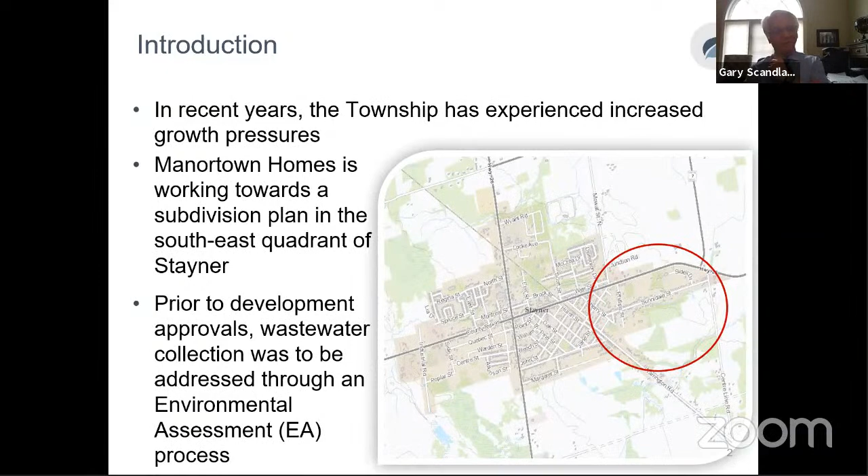Hopefully I can be as eloquent as Jennifer in trying to present the engineering information, so we'll give it a try. Next slide - so they were looking at 3 different solutions, if you recall. They were looking at do nothing, so letting it sit.

Build a new pumping station and force main, which would service basically the whole area. Then they looked at one which was to assess or put the servicing in solely for Manortown Homes development. So they had done the costing and looked at the options. Now, when we get into it, we're looking at option 2, so the costing that we'll be presenting is for the most part option 2.

So putting in a pumping station and a force main and the associated sewers that will service most of the area. And I'll say most because as we were going through, we observed that very large area, area I, which we'll show you in a minute on the map, it's so large, but the development is delayed potentially for perhaps 20 years or longer. And what that does is it impacts the totality of the calculations, and there's a lot of stranded

expenditures that somebody has to front end. And it would be difficult for the municipality to front end it, for Manortown to take all of the obligations, et cetera. So as we get into it, we are actually going to present to some extent a modified number 2 for tonight.

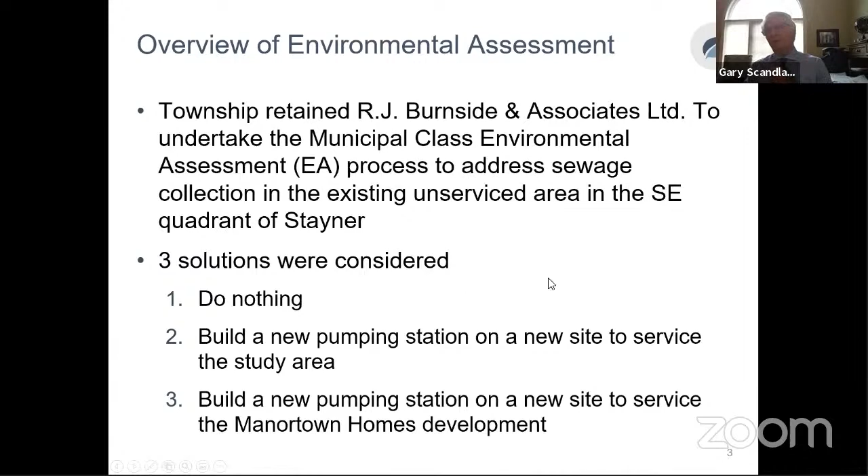And Jennifer from Burnside have adjusted the costing information for the pumping station, the force main, some of the pipes, in order to give you a costing that reflected that. Now, I'll talk a little bit more about it as we get into some of the maps and such.

So for the most part, what we've got is the pumping station and force main that benefits all of the existing lands as well as Manortown and some of the other development related properties. There's gravity sewers that for the most part migrate from the west side down to the east and into the pumping station. There's a small section on the west side of the pumping station they'll fill in. And then there's some upsizing sewers still on Sunnidale and then to Phillips and then to Highway 26.

And as well, there was discussion on the implications of considering urbanization of Sunnidale Street as well. So we'll talk about that.

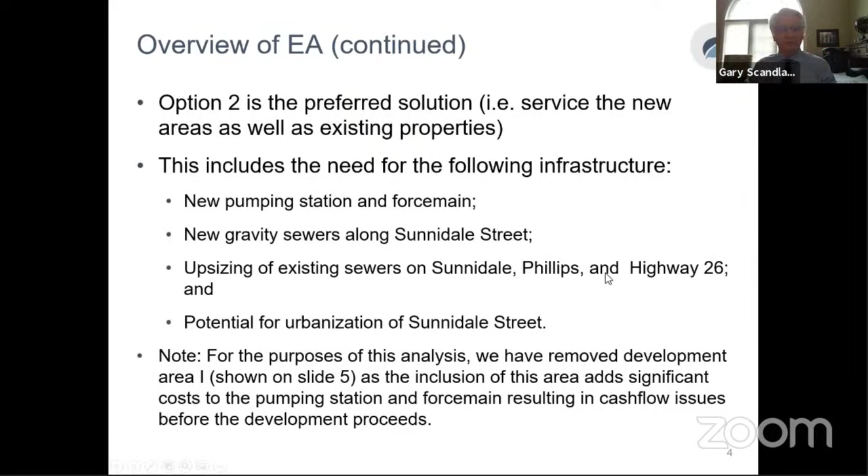As you've noted, the last note, we'll talk about I, because the size of it and the impact of it actually is going to cause problems in cash flow and just allowing this area to develop, because they're not looking to develop in the near future. It's really still in an individual's hands, and even though it's in the built boundary, there's no real movement on that property. So next slide.

But the flows that are coming out of it basically represent almost 50% of the flows that were calculated for all of these developing lands. And that's where we're talking about the cost associated with it is quite excessive. And basically we'll be sitting there with stranded expenditures that can't be cash flowed.

So the biggest impact really is they will have to build a connection main to the pumping station. For the most part, it looks like the rest of the pipes can handle additional flows. We might have to do some improvements to the pumping station, upsize the pumps, might have to put some additional wet well capacity. But for the most part, it could probably be handled with subsequent engineering. So we've looked to not include them in the calculations right now.

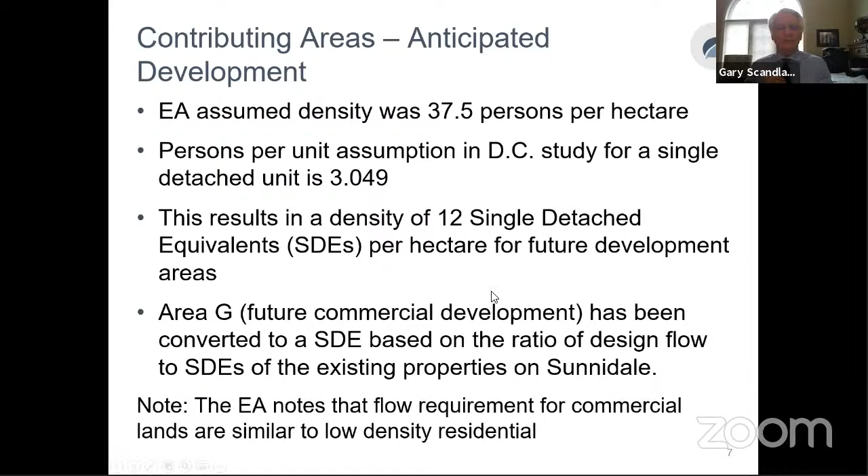If we go to the next slide, this is where we've got the calculation. So we have E on the far left-hand side, those are the areas I started with on the map. You remember H was the yellow area for the existing. So these are all the different lands. We have the area, and then the design flows, and then we've converted all of that. By the time we get to the extreme right-hand side, those particular properties have the equivalent of X number of single detached units.

So the flow associated with those lands would be equal to 14 single detached, or 20, or 38, or 59. You can see that when we look at I, when I talked about it being basically half the lands, when we convert it to single detached, its flow is about half of the total area. That's that 259. That's why we're suggesting to remove it from servicing right now, and then we'll do the rest of the calculations on the benefit arising from the residual of the lands.

Now, when that area I comes on stream, any improvements will be 100% charged back to I. So if there's improvements on upsizing pipes, that'll be their cost. When we may need to make changes to the pumping station and the storage in the wet well, that'll be 100% their cost. So we've actually reduced the cost from what Burnside had put into the EA, in order to reflect a smaller servicing area. Next slide.

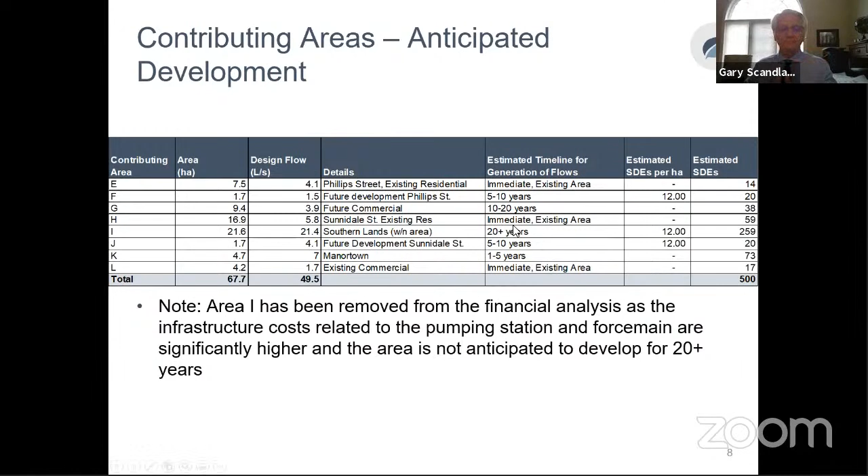So when we get into it, I'll show you a chart in a moment that takes each of those pipes, the pumping station, and the force main, and allocates it amongst different benefiting lands. And so we have, obviously, the Development Charges Act.

The development charge for sewers that you've passed would be one component of paying for these works. We then have Part 12, which is almost like a local improvement, but we always use this section of the Act because local improvements are a very cumbersome piece of legislation. You can do the exact same thing and impose a capital charge under Part 12 of the Municipal Act.

It starts with clause 391. Why we always suggest it is it's far more flexible on how you do the calculations, where local improvements has a very narrow way of doing the calculation.

It also allows council, once you pass the bylaw, then it cannot be appealed to LPAT. The local improvement can, so then there's all these deductions and adjustments. But for full cost recovery, when you go through the public process and finally make a determination, those charges being imposed are basically non-appealable. So it's a very strong piece of legislation, but it does mean you should have a public process to engage everyone so that you've taken all of their comments into consideration.

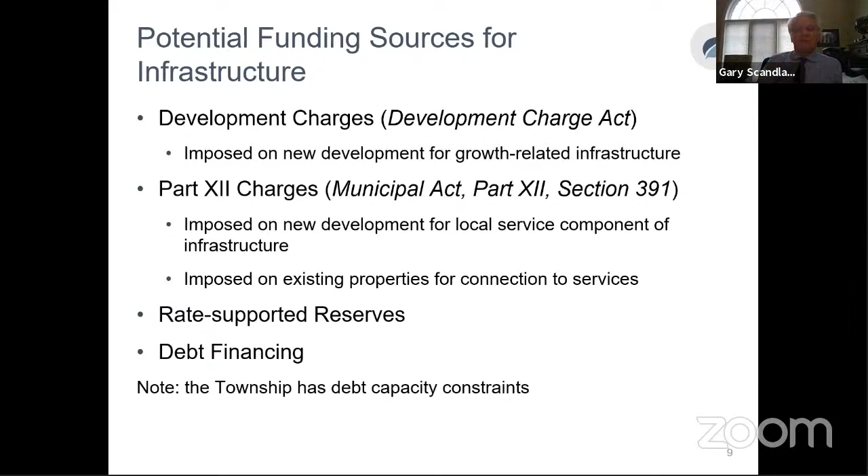So those are the key pieces of legislation. If we go to the next slide, this is how we've broken the costs down. So we have development charge projects: the new pumping station, as well as the upsizing of the existing sewer on Sunnidale and the upsizing of the Phillips Street sewer. They were identified in the development charge study, so those are part of the DC provisions, paid for by growth.

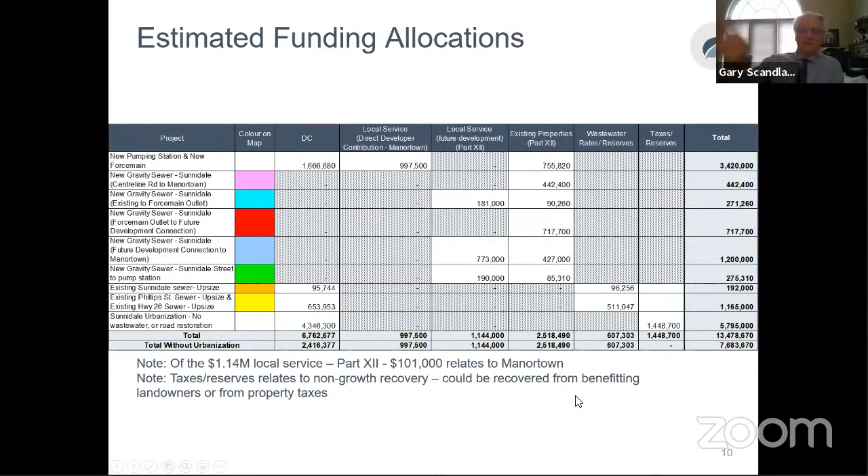When we jump forward a little bit, we'll also be looking for Manortown to cash flow those growth-related projects under the DC. You can see the very last project, the Sunnidale Urbanization road — 4.3 million is DCable, roughly 1.5 million recoverable from existing properties, about 5.8 total. That project doesn't have to be done today; it's in the DC and can be done at any time, whether now or 5 or 10 years from now, at the discretion of council. So it's not integral to making this servicing plan for the sewers work, but it is there to be considered.

As we move across, you can see that when I talk about local service, those are pipes that benefit growth, but they're smaller sized pipes.

And therefore they are paid for by the developers for their share. So the first local service is a direct contribution by Manortown. So they'll not only pay the DC portion, but they'll also pay a local share of it.

As we move to the right, you can see some of the gravity sewers, because remember, we're building on the flows going through the pipes. So some of the G and some of the J benefit from the construction of these sewers as well, so that would be recoverable from those lands, but we'd recover it under the Municipal Act. The existing properties would be under that Part 12 charge, and this is their share of all the works. Then there's a small component that would be paid for through the wastewater rates or the reserves.

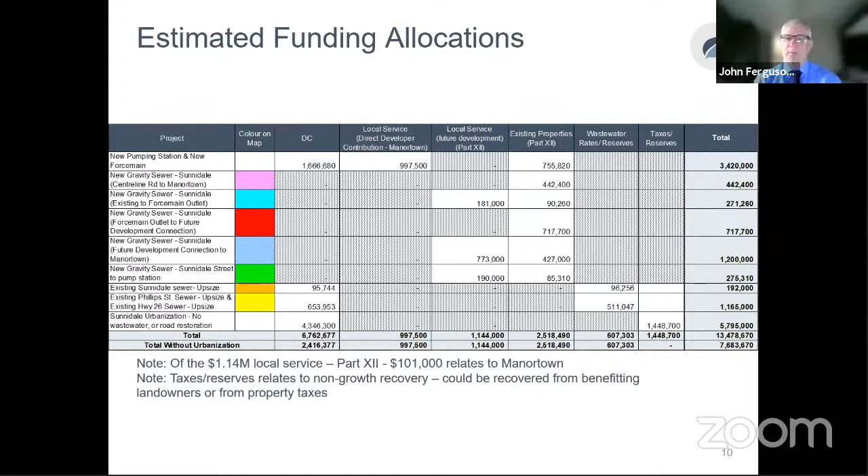Through you, Mr. Mayor, good question, Mr. Ferguson. You can offer them to pay it immediately, or most municipalities allow them to pay over a period of time. You have the flexibility to allow a 10-year, 15-year, or 20-year loan - it's your choice. If we look at places like King City and Nobleton, which put in extensive sewers, they basically did a 15-year debenture, and roughly 35% of the people settled their cost immediately, and 65% took the loan.

Anybody else with any questions on this slide? I have one for Gary and/or Mike. I know we've been speaking a lot about Sunnidale, but I'm interested in Phillips Street, wondering if there's any urbanization plan for Phillips Street as a result of both the Ashton Meadows requirement on that street, and now this Manortown/Sunnidale forcing Phillips Street to be dug up and have a new pipe put in. Is there any talk of urbanization or any recoup in regards to that along Phillips?

Your worship, the Phillips Street north of Sunnidale Street is part of the EA area. The part that goes south from Sunnidale Street would be the part that Ashton Meadows requires to service their lands. That street does not go straight through, so there's not going to be an intersection at Warrington - there will be a servicing corridor, an easement only. The road is too narrow between Highway 26 and Sunnidale Street to do anything with it. We're going to put a sewer line in there and keep the existing one active while doing it - we'll be lucky to do that, it's going to be a tough job. There's no room there, the right of way is very narrow. So no, the short answer is no, we won't be urbanizing Phillips Street, and it wouldn't be considered.

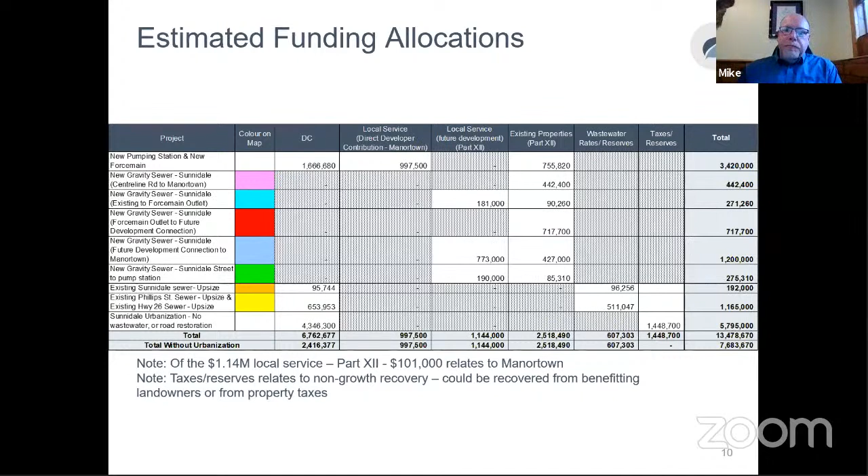Sorry, Phillips Street, you meant we will not be - Phillips Street, thank you, yeah we will not be urbanizing Phillips Street. Other than when it's all said and done, it'll be a nice new piece of asphalt on top of all those new pipes, is that right? Yes, sir. Okay, all right, I think we've banged that one around. Anybody else?

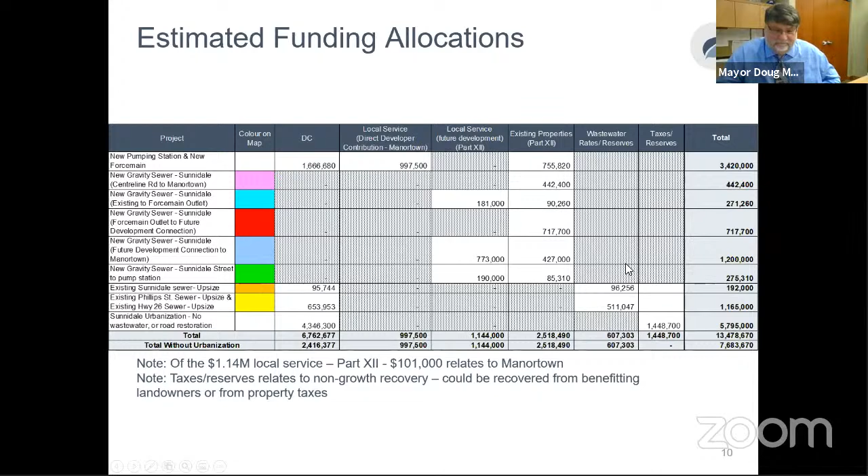I'll turn back to Daryl and Gary. Go ahead. Thank you, Mr. Mayor. Next slide please. So if we take the cost extending off of that local, that part 12 amount for the existing properties, and we've costed it all in on the left-hand side, let's go on the right-hand side.

The right-hand side is the share of the wastewater servicing only, so it doesn't include the urbanization. There's about $2.5 million that has to be collected from the benefiting properties, so it's approximately $28,000 per property.

For that benefit, if we add on top of that the cost of the road, it's about $44,000 for the sewer servicing plus the urbanization of Sunnidale. I looked at the 27 versus the 44, that's where I came up with my 17. With rounding, it's actually about $16,000 difference per household.

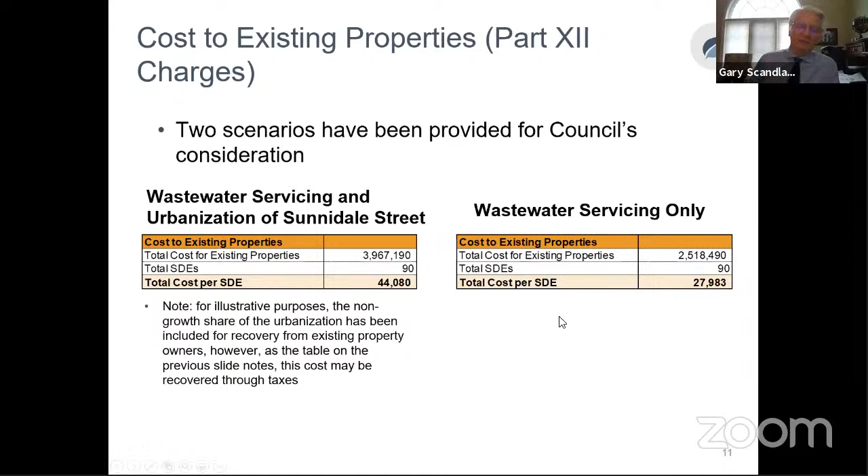So if we go with the servicing and the benefit of the wastewater, we'd have to be offering loans. We'd be debenturing. We'd offer the residents the opportunity to pay their $28,000 up front, or give a loan over 10, 15, 20 years, whatever council deems most equitable. And if we go with the urbanization, then I have to consider that extra $17,000 charge.

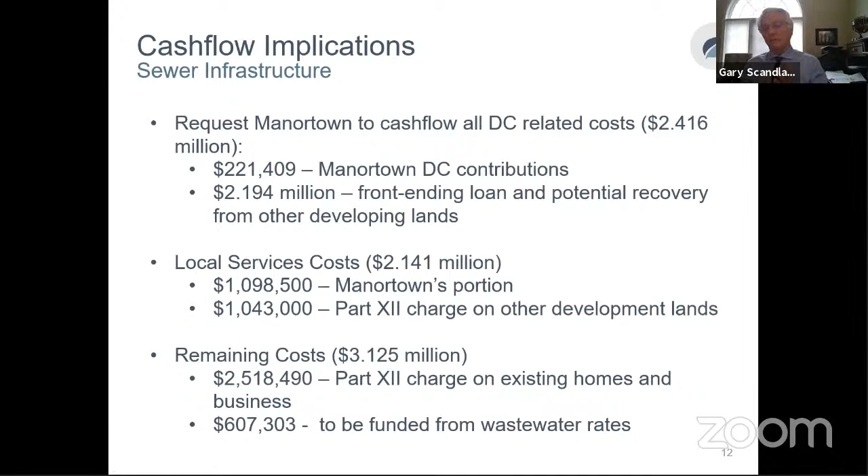If I stop there, Mr. Mayor, are there any questions on this particular one? Okay, we'll open it up. Is anybody?

Carry on, gentlemen. We were hopeful of reaching out to Manortown before this meeting. Unfortunately, because of my scheduling and stuff, I do have some hearings that are in progress, so I didn't get the chance to connect, but Daryl and myself will connect with them over the next couple of days to chat to them about this, and then we'll provide those comments subsequently.

And then the next slide just talks about next steps. This is the last slide. With council's direction,

we'll talk to Manortown about their financial obligations arising from this. We need council's direction on the impacts on the existing homes for the wastewater servicing, and then potentially for the urbanization. Some of the costs we identified here are higher than what we originally included in the development charge. Obviously, we had estimates from a couple of years ago, now you've had Burnside doing very detailed work, so we'll need to update some of those costs.

And just as an aside, the work that Burnside's been doing on the water supply, the costs are actually increased as well, so we can wrap all of that into an update of the development charge. We would look to do that over the next 2 or 3 months.

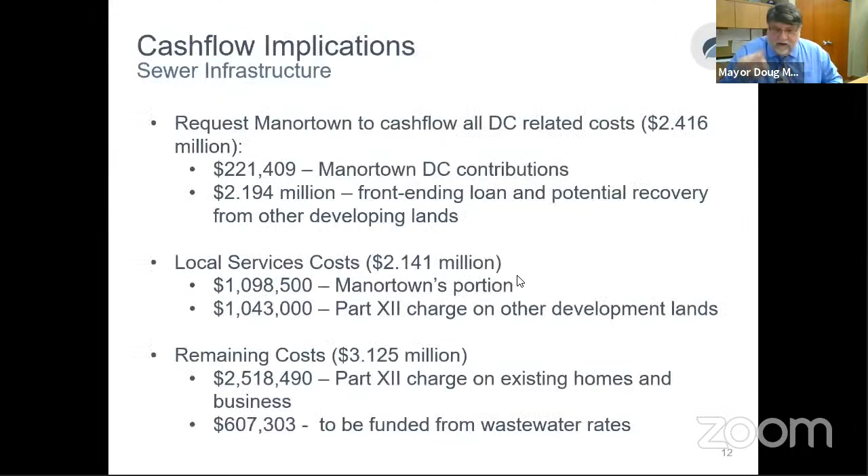Go ahead, John. And while John's speaking, Daryl, could you put up the map that shows the different areas with the letters? Go back, keep going. One of the first indications. Keep going, right there, just leave that up for a minute. Go ahead, Barry. Or John, I'm sorry, go ahead, John. No, thank you, go ahead, Rick. Barry, I'll wait until Barry asks his question and then I'll.

I'm done. Okay, Mr. Lamers, go ahead. Too many Johns on my screen here. Thank you, Your Worship. With Gary or Mike, with all these

calculations and everything, does anything apply to decommissioning the old septics, or is that all on top of this again? Mike? Yeah, no, Councillor Lamers, through the chair, decommissioning and connection to individual houses will be borne upon the homeowner, will require plumbing inspections, and it's not included in this.

This project stops at the municipal property line. Is that helpful, John, Lamers? Yeah, so all these numbers, 17,000 or whatever, you're adding another 3,000 to 5,000 on top of that to decommission these properties. At least 5 in today's numbers. Yeah, perhaps more than that even.

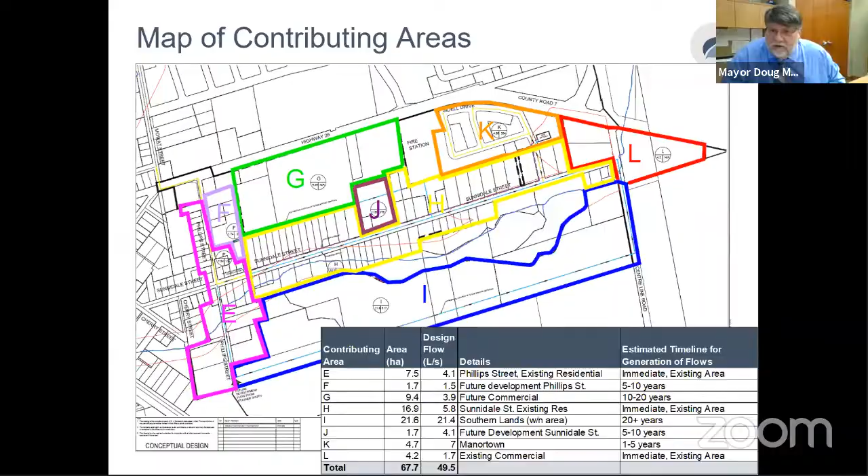Anything further you want to add? No, that concludes our remarks, Mr. Mayor. All right, well, thank you, gentlemen, and we appreciate that. So, Mike, you have a report. Do you want us to put this on the table and you want to speak to it, or what's your pleasure, Mike? It's your report.

You can read the recommendation, your worship. Basically, it was just to get something, an official recommendation from council based on what Gary's presented. Okay, all right council, well it's your pleasure.

I will read this PW 017-2021, the Stayner Southeast Sewer Financing. Recommendation: be it resolved that Council of the Township of Clearview hereby one, receive the Stayner Southeast Sewer Financing report for information. Item 2, direct staff to create financial agreements with benefiting developers. And item 3, direct staff to provide a bylaw outlining conditions for sewer connection fees for existing properties in the study area.

So on the floor, can I have a mover and seconder please? That'd be Councillor Broderick, seconded Councillor Leishman. Any questions or comments on the report and on the direction so far? There are no comments. All right, I'll call the motion. All those in favor? And that motion carries, thank you very much.

Thank you, council. Thank you, staff. Before we leave this, Mike and or Mr. CAO, would you guys be able to advise when we would be able to go to the public with this presentation so we can have this meeting and get some input? What's your thought on that, Mike and John? So if I may, Your Worship, we need to reach out to Manortown first and find out where they're at with the financing.

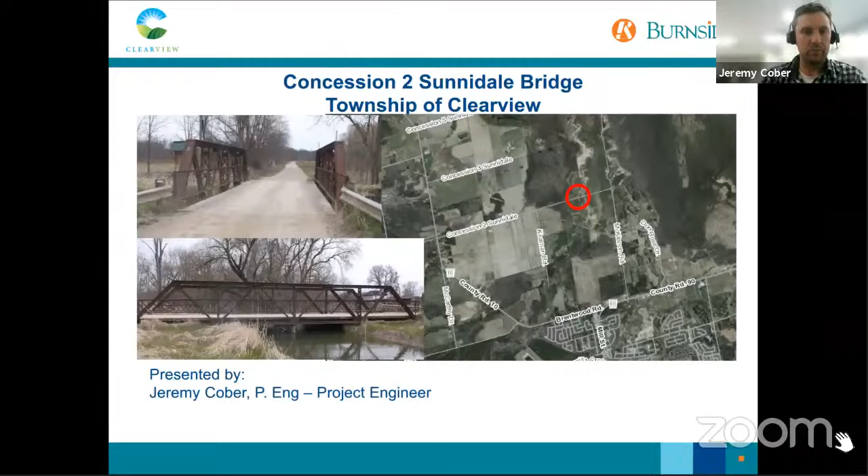All right, so good evening, Your Worship and council. My name is Jeremy Cober, I'm a professional engineer with RJ Burnside. Tonight's presentation is regarding the condition and the current temporary closure of the Concession 2 bridge. It's located on Concession 2 between McKinnon and Kearnan Road, down in the southeast corner of the township, close to the border with Essa Township. We've got a couple photos of the bridge there. If you want to jump over to the next slide, Kayla.

So the purpose of tonight's presentation is to provide a summary of the structural condition of the bridge, identify various repair options, replacement options, identify any current use patterns, local resident property concerns, and the procedures required for closure of the bridge if that is required.

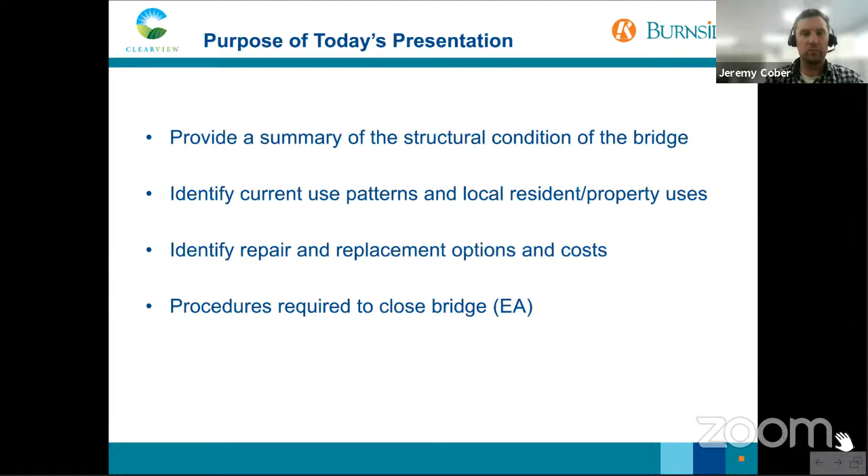So the Concession 2 bridge, it's numbered 324-01. It's located over the Mad River, approximately 3.7 kilometers east of County Road 10. The structure consists of a steel truss bridge with a timber deck with an unknown construction date. It's expected that it was constructed likely in the 1930s vintage. The structure was a sister structure to the bridge on Kearnan Road, which collapsed in the mid-2000s, which resulted in the closure of Kearnan Road. The bridge span is approximately 18.2 meters. The road width over the bridge is approximately 4.2 meters, which currently restricts the use of the bridge for agricultural vehicles, just due to the width.

The structure is inspected every 2 years in accordance with the Ontario regulations and the OSIM inspection manual, along with all the other bridges within Clearview Township. The structure was rehabilitated in 2011 following some damage to the deck and some of the stringers. That rehab consisted of replacing some of the steel beams under the bridge, along with replacing part of the timber decking.

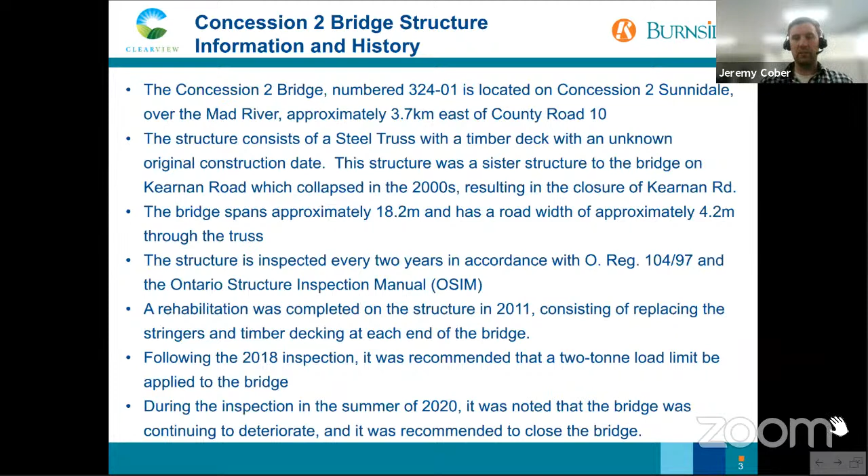Following the completion of the 2018 inspection, it was recommended that a 2-ton load limit be applied to the bridge. And following the inspection last year, completed in May of 2020, it was noted that the bridge had continued to deteriorate, and a recommendation was made to the township to close the bridge.

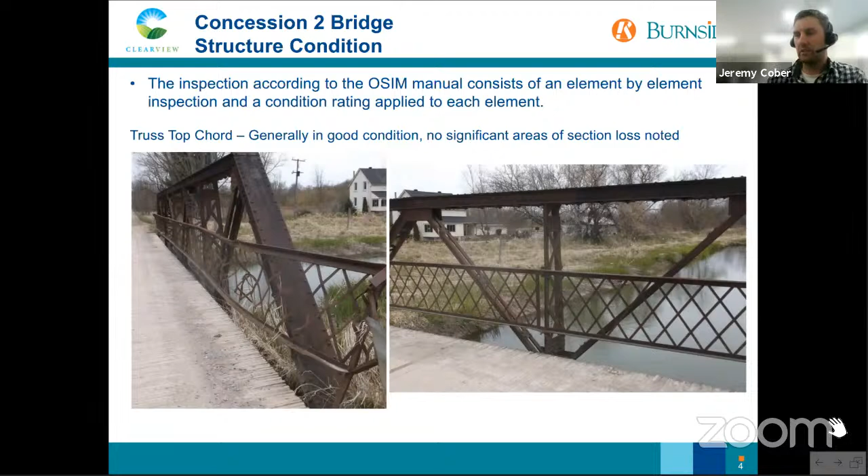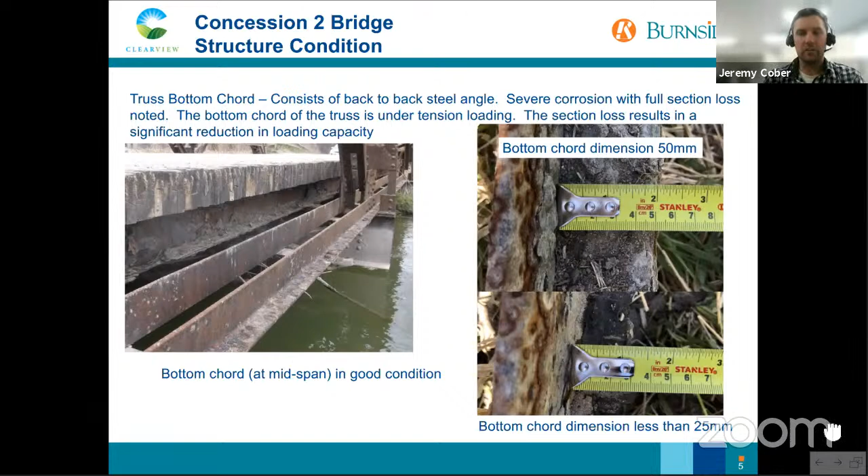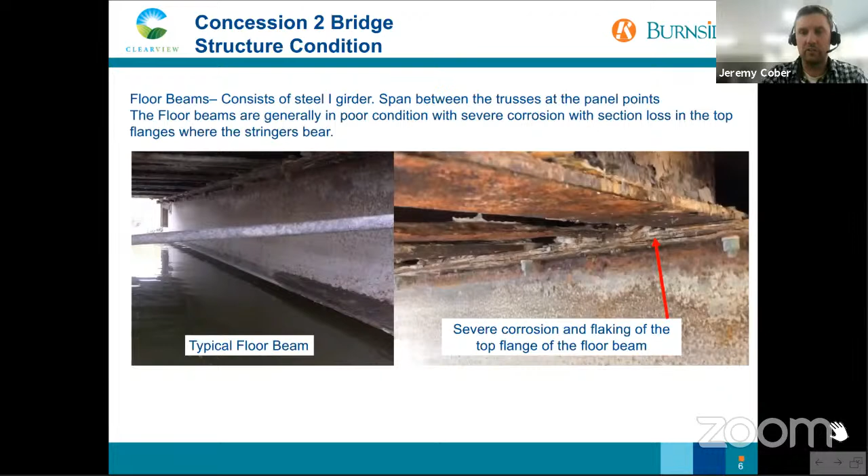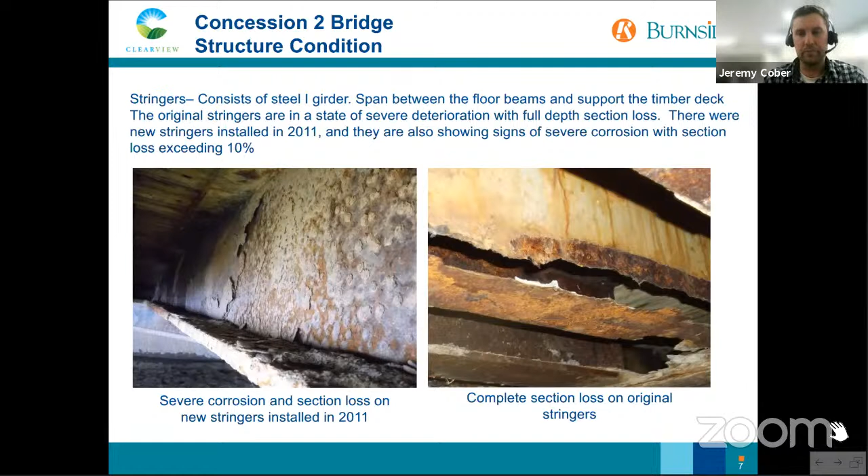So the primary factors leading to the recommendation to close the structure in May 2020 was the severe corrosion and section loss of the bottom chord.

That angle iron performs a key structural component to the bridge. It acts primarily in tension, and if that chord was severed, there's basically nothing to keep the legs of the truss from spreading out and the truss collapsing, which would be a catastrophic failure of the truss.

The severe corrosion and section loss on the floor beams and the stringers results in a reduced capacity of the structure and the potential to punch through the deck if those girders were to fail, or additionally a potential catastrophic failure of the bridge if one of the floor beams were to fail, which would result in whatever vehicle was traveling over it falling down into the river.

Some other observations were made about the bridge and concession 2 in general. The bridge is routinely submerged underwater during spring melts and also during large rain events. This has led to accelerated corrosion of the stringer and floor beams due to repeated wetting of those elements. We know that as steel gets wet and dries, it accelerates corrosion.

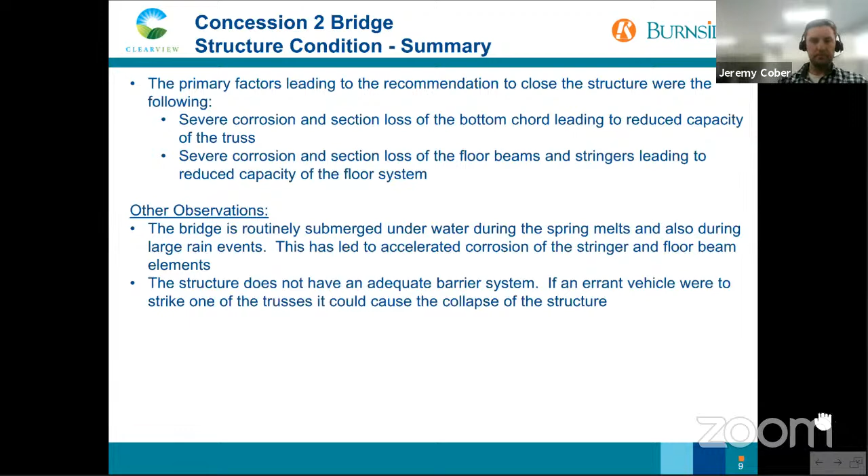Just a few notes on concession 2 itself. From the bridge to the east is a no winter maintenance road. During the spring melt and during large rainfall events, that section of road is often underwater and not passable. I believe it's often temporarily closed for a good part of the year.

Due to changes and siltation in the river system, there's been significant deposition of sediment within the Mad River over the last 30 years. Talking with Steve Sage and Mike, and also Steve Riley from Burnside, 20 years ago that bridge used to be able to be walked underneath with plenty of room to spare.

Now there's less than about 3 to 4 feet of clearance from the bottom of the stream to the underside of those girders. Basically, there's been 3 to 4 feet worth of sediment settled into that river, which has significantly reduced the capacity of the Mad River in that area.

That's resulted in a lot of water going over concession 2 and also being carried east along the ditch, which has been cleaned out along concession 2, and over and under through the culvert on McKinnon Road and out towards the Nottawasaga River, as opposed to continuing along with the Mad River and joining further upstream or downstream where the Mad River actually joins the Nottawasaga.

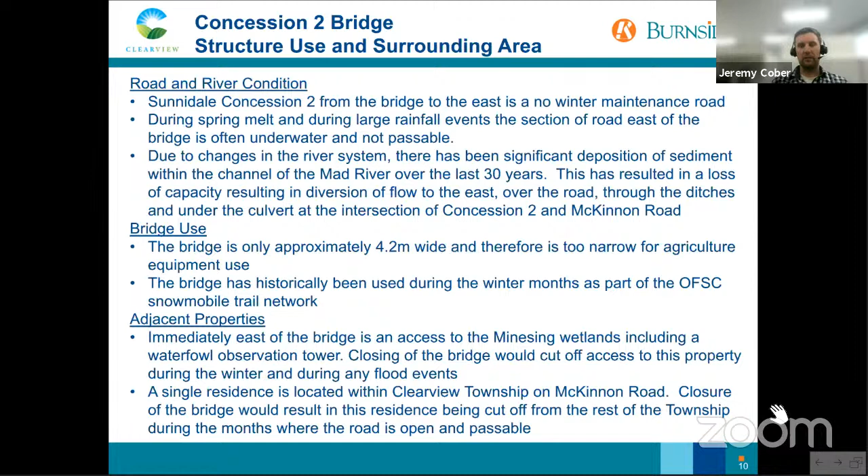Temporary closure of the bridge for safety purposes does not require any EA process, and the temporary closure has been completed. The township placed concrete barriers on April 1st, restricting access to the bridge and to Concession 2 from McKinnon Road to the west. As a temporary closure, this is considered a Schedule A item and does not require notification under the EA Act beyond this, as it's a temporary measure at this point in time.

One option for the structure would be to retire and remove the bridge from this location. Under the revised or proposed amendments to the EA Act, this would be considered a Schedule A+ item, so it would not require a full Schedule B EA. However, this specific bridge would likely be determined to have heritage value, and under the proposed amendment it is allowed to be removed, but it would need clearance from the Ministry of Heritage, Sport, Tourism, and Culture Industries. This is a bit of a change from how things were done in the past. It's not quite clear what that process would look like. Basically, we would have to apply and provide the MHSTCI with anything they would require to their satisfaction in order to remove this bridge, should that be the direction council would want to go with.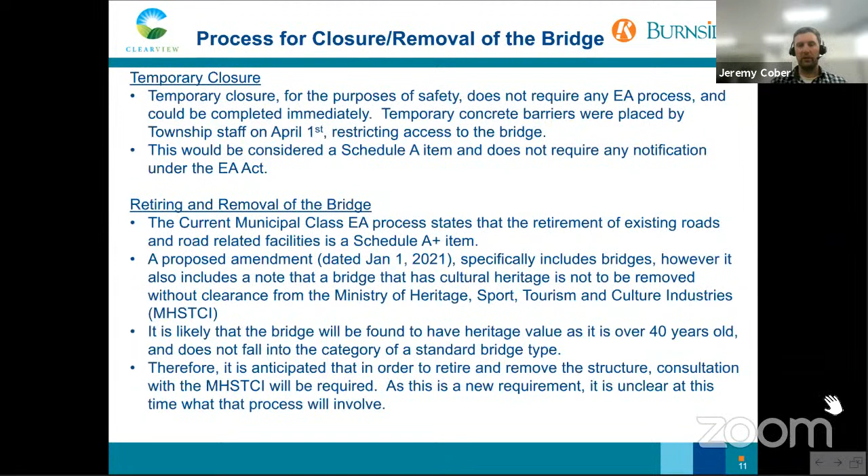So we'll outline a few different options for the bridge. The current situation is that the bridge is temporarily closed, completed on April 1st, 2021. To remove the structure, the estimated cost would be approximately $75,000. That would include, or be in addition to, constructing a turnaround area for snowplows and garbage trucks. Additionally, there may be costs associated with consultation with the MHSTCI as required.

Another option would be to repair the structure. This type of repair would be similar to the repair completed in 2011, expected to provide approximately another 10 years of service life and cost approximately $300,000. It would consist of replacing the severely deteriorated stringers, reinforcing or replacing the floor beams and bottom chord, and installing a more appropriate barrier across the bridge. This would not give any opportunity to increase the width of the bridge — it would still be narrow, actually narrowed a bit more due to the barrier. So it would not allow for increased traffic or agricultural loads to travel on the bridge, though it could result in increasing the load limit from the previous 2 tons back up to 10 or 15 tons, depending on a structural analysis.

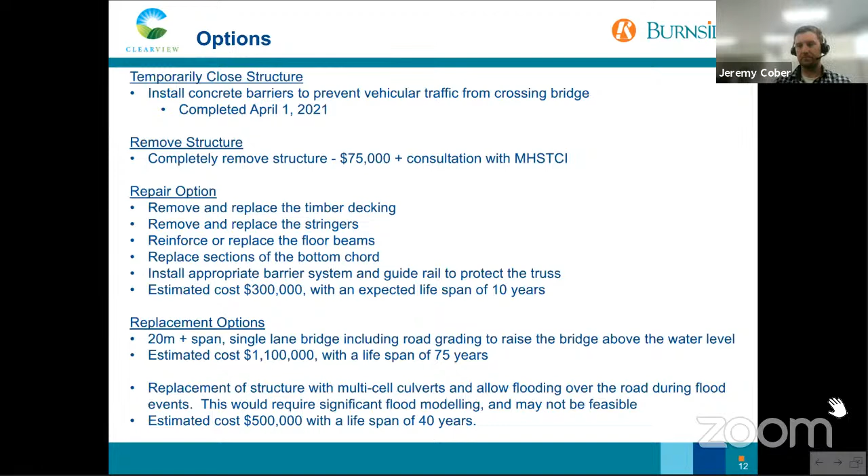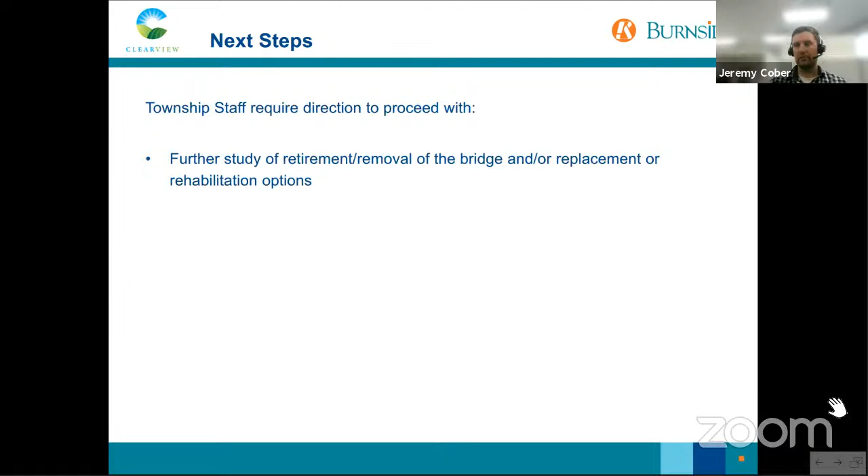So I'll jump to the next slide. At this point, township staff is looking for a recommendation from council as to further study of any options, or what option we would like to proceed on. So with that, I'll pass it back to the Mayor and to Dan for any other comments.

All right, thank you very much, Mr. Cober. It's a beautiful little part of our community down there, and it's unfortunate that the bridge is in such poor repair and has obviously deteriorated. There are going to be a lot of questions, I'm sure. If I can, gentlemen and councillors, I'd like to go to Councillor Lamers first — it's directly in his area, and Mr. Lamers has some knowledge of the specific area. So let's go to John Lamers first for comment, and then we'll go around the room.

Go ahead, John Lamers. Thank you, Worship. Yeah, it was hard to take, 20 years ago, when they closed the Kernan Bridge on us. It cut off most of the traffic, and now closing this bridge off — if we have a significant event on County Road 10, we have to go back to Sunnydale Corners, or Lyle to Baxter, in order to get around. We have no other route with closing these roads. So we need to keep this one open, or open up Kernan Bridge again.

Thank you. That's a good comment. Perhaps you could share with us your knowledge of the second concession and the extent of flooding that happens down there, Councillor Lamers.

Certainly flooding events do occur, and if Councillor Patterson is with us, I hope he would jump in. This is in the NVCA area, and it's a perfect example of how the riverbanks need to be maintained and hardened up across Ontario. That's what they're all about, is flooding.